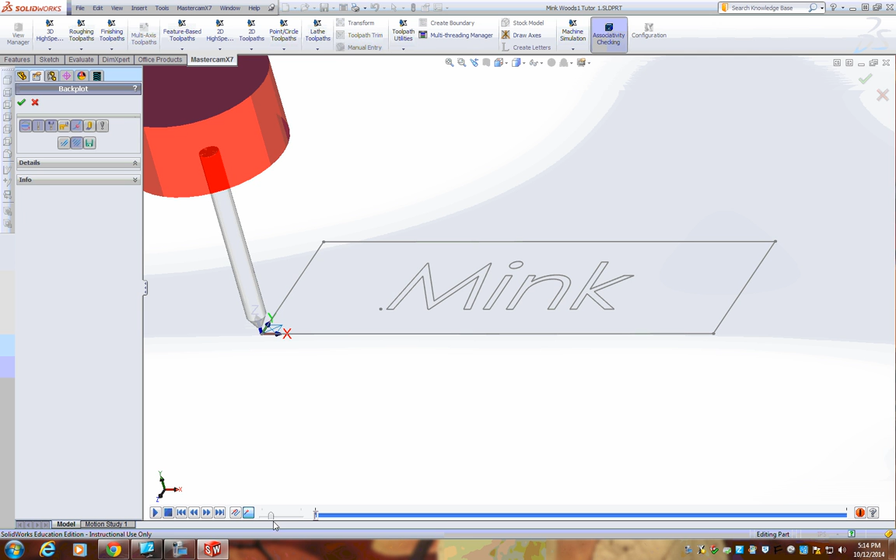The first three icons allow you to display different lines, tools, display holder, or display the tool. Down here at the bottom allows you to control the speed. I usually put it at about 25% and click play. This allows you to view what is going to happen to make sure nothing will crash or run into something you don't want, like a screw or some other way to hold your material.

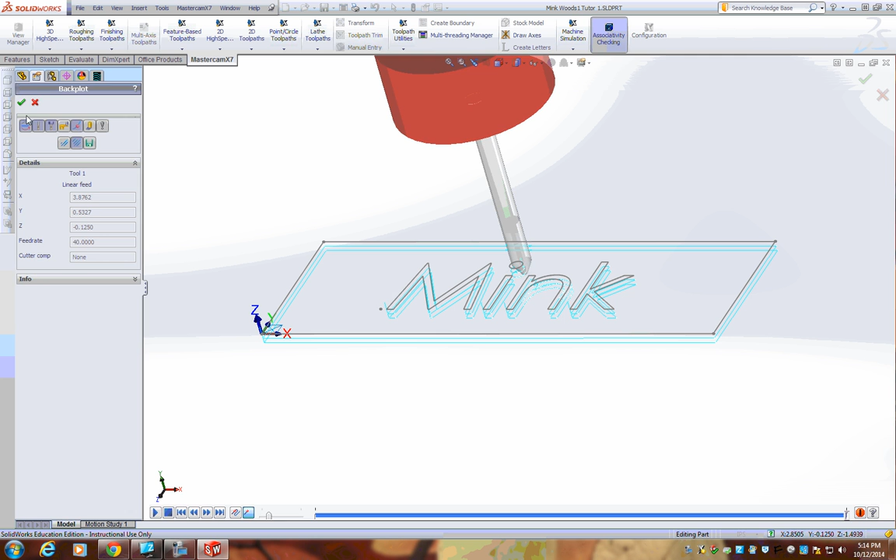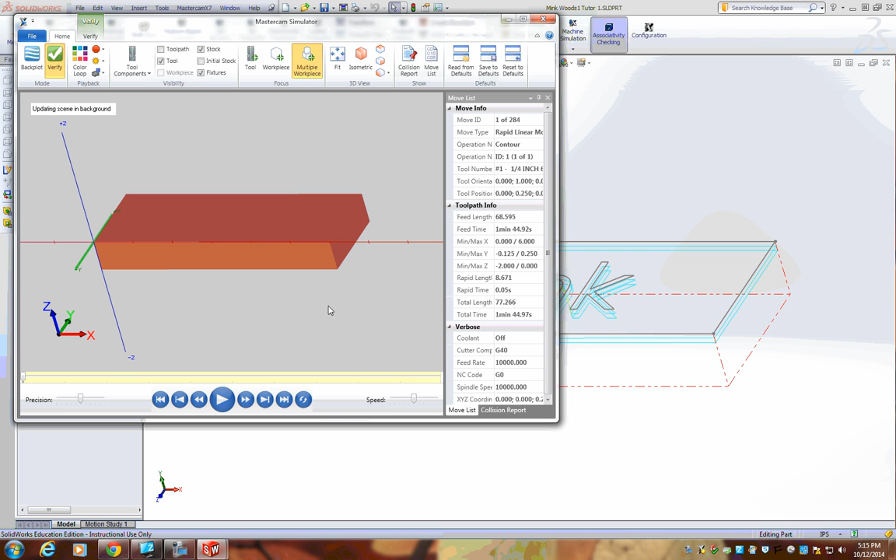Once this is done, the other way to view it, press check, is called a verify. This uses the data that we gave it, the size of material, and the actual drawing to give us a 3D representation of what's going to happen, whereas the other one was kind of more of a 2D. This one also gives you feed time, which is approximately a minute to 2 minutes.

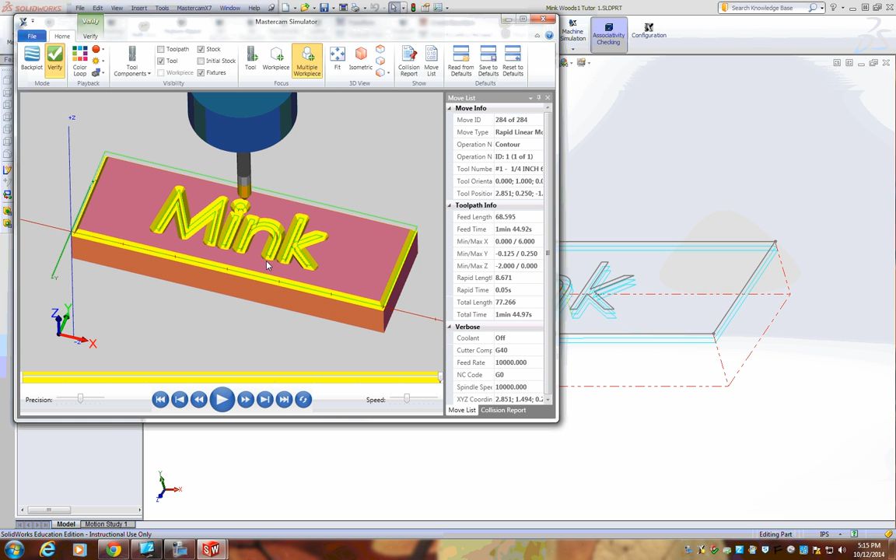Press play. You can change the speed here to slow it down or speed it up. You can rotate it, zoom in, zoom out, and get a feel for what it's going to be like. Looks okay. So we can get out of here. Let's change our view orientation to isometric.

And now we can export our G-code. Again, this is the language that our CNC router speaks. So we're translating it from our drawing to this code. Make sure this active post says MaxNC 3-axis mill. Otherwise, you won't be translating it to the correct language. If it does not say that, get your instructor.

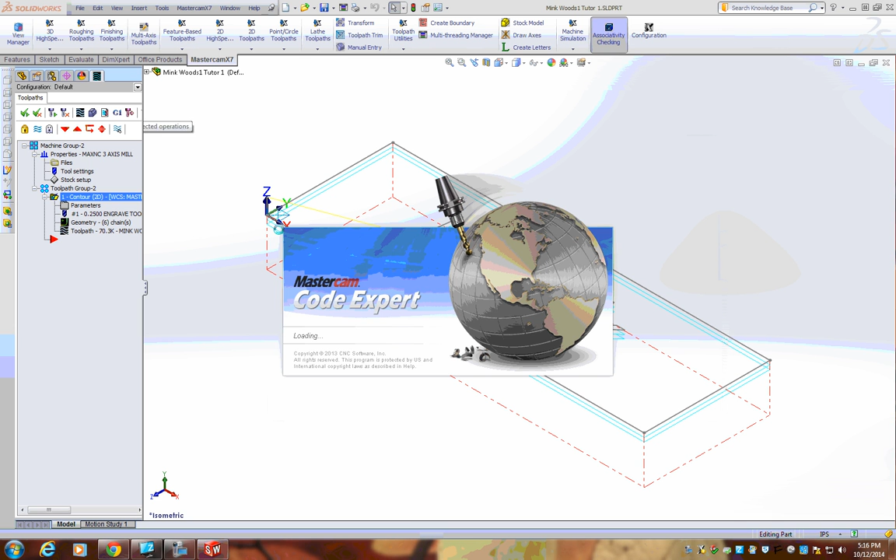Press check. It's going to open up and ask you, where do you want this stored? You want to store it onto your network drive and in the same location as your file. Please do so and click Save. This Code Expert is basically your translator. When it opens up, you'll be able to see what the code actually looks like.

The code uses what is called G-code, and it also uses your Cartesian coordinate system, X, Y, and Z. So on here you can see the comment that you put in, and here mine says Mink, Woods 1, Tutor 1, and 1/4 inch V-bit. That way, if you have multiple G-codes and you forget which one is which because you didn't label it correctly, at least you will have a description here as to whose it is, what it is, and what bit you are even going to use.

As we scroll down, you can see it takes approximately 290 lines of code just to cut this little thing. You no longer need this. Press X. Now that you have saved it into your network drive, you need to resave this G-code onto a flash drive to get it to your machine.

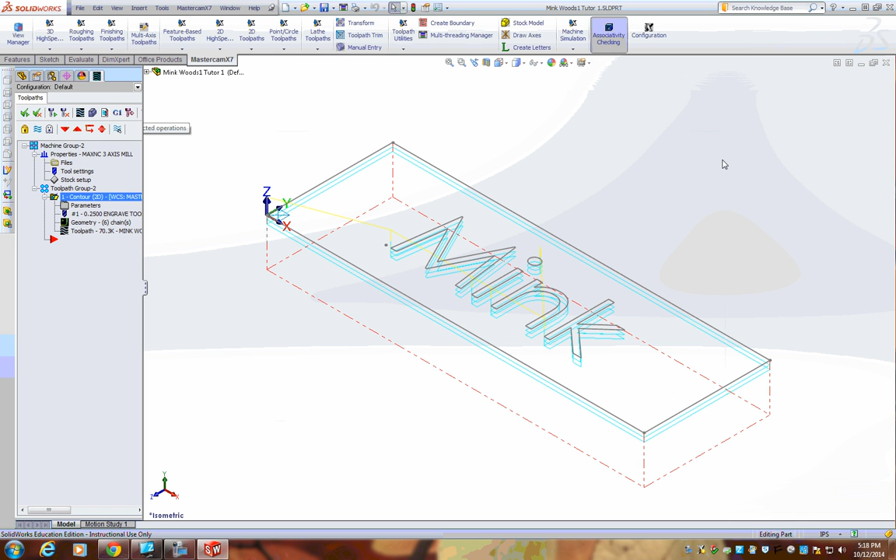The quickest way to do that is just to click on G1 again, check mark, and when you select a flash drive, it'll be under here, under the computer. Select the flash drive and save. Once you have it saved in your flash drive, you're ready to cut.